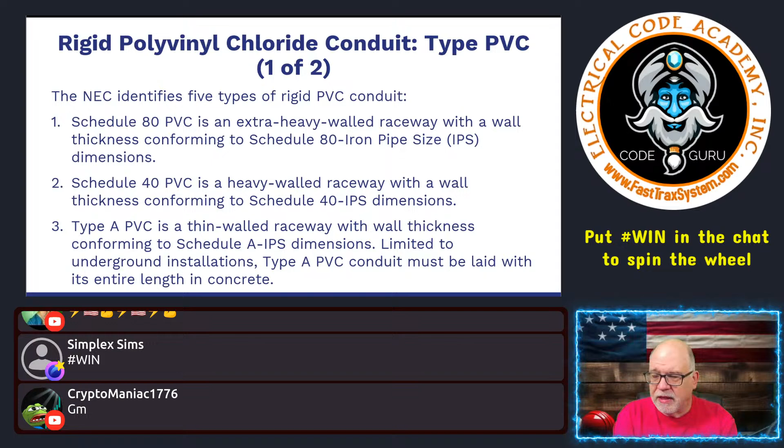A lot of people that are doing duct bank designs and things like that may use Type A PVC for that application. It doesn't preclude you from using something like a Schedule 40. It's just another type of wiring method that is PVC, Type A. Next, you have a Type EB. And again, you might not even be aware that there are different types and their applications.

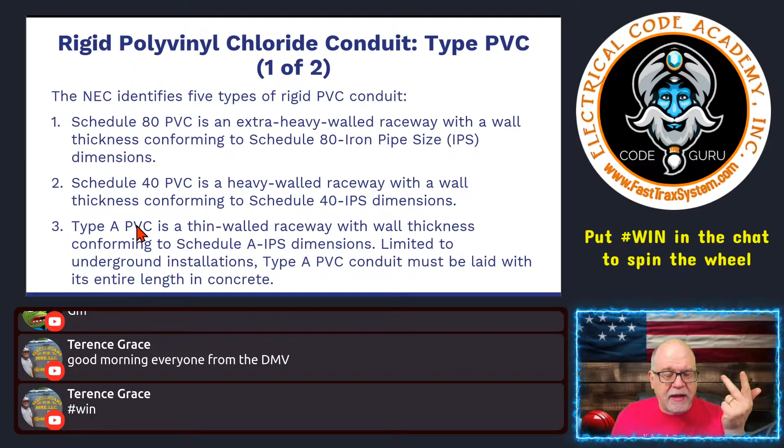So again, this recap. You have a Schedule 80, more robust in areas where you're worried about damage. You have a Schedule 40, probably the workhorse you use most of the time when you're using PVC. Then you have a Type A, which is a thin-walled version that's really designed to go into the ground and be encased in concrete. Then you have what's called Type EB PVC.

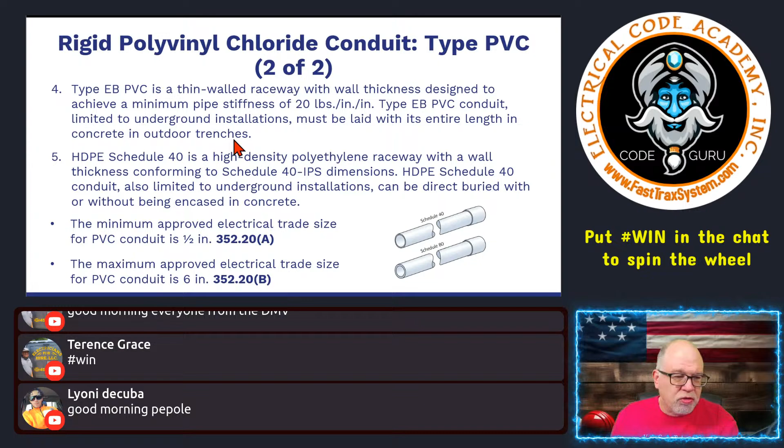That's a thin-walled raceway with a wall thickness designed to achieve a minimum pipe stiffness of 20 pounds. Type EB PVC conduit is limited to underground installations, and must be laid with its entire length in concrete in outdoor trenches. Okay.

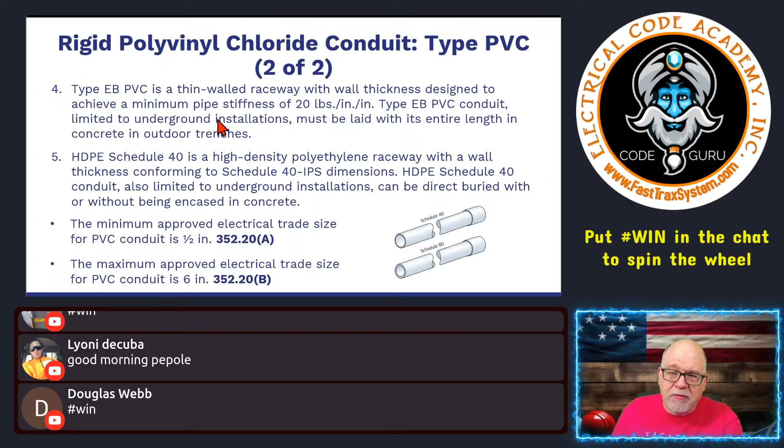Now, if you're doing massive projects, then maybe. But I don't see any benefit to it unless it's a cost benefit to have EB. So I'm probably going to see mostly Schedule 40 underground work. And as it comes out of the ground where it's subject to possible physical damage, by whoever makes that call, then you'll see it change over to Schedule 80 where necessary. That's probably what you're going to see the most.

Also, lastly, there is an HDPE, high density polyethylene, Schedule 40. So it's a high density polyethylene raceway with a wall thickness conforming to Schedule 40 dimensions. HDPE Schedule 40 conduit, also limited to underground installations, can be direct buried with or without being encased in concrete.

So HDPE is some tough stuff. It's still Schedule 40 thicknesses, meets all those rules, IPS dimensions, but it can be installed with or without concrete encasement. But it is limited to underground applications, and it is HDPE. So above ground and below ground, Schedule 40, Schedule 80.

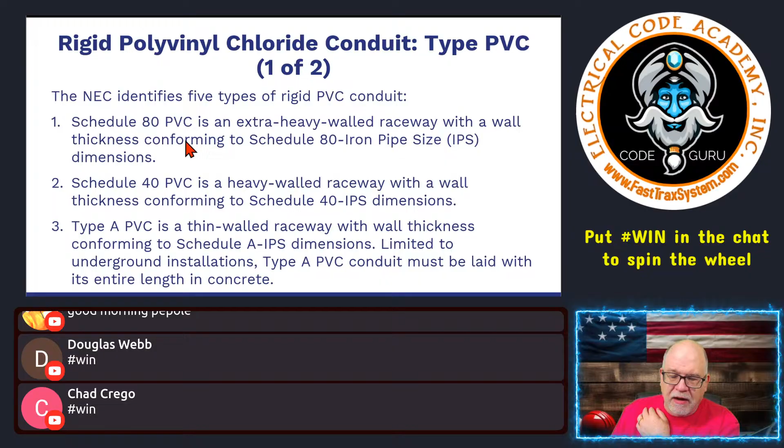The other types that are available, for below grade underground applications, EB has got to be encased in concrete, and so does Type A, its entire length encased in concrete, but it can be underground. And then, of course, you have HDPE, high density polyethylene type.

And again, don't get confused and buy that when a supply house says, hey, all I've got is some HDPE Schedule 40, it's okay. No. It's limited to underground installations and direct burial, but you don't have to encase it. Right. That type of thing.

All right. Now, as far as the National Electrical Code, when it comes to the sizes of this stuff that's available on the market, we have seen a change, and I'll go and show you. But the minimum size that you're going to find for this is a half trade size, right? We call it half inch, but it's actually half trade size. And the largest PVC that you're going to find is trade size 6.

Okay, and if you look at it, I'm going to show you. Hold on here. Let me go over here in the code real quick. Let's see. That might have been the last code cycle. I don't see anything else in there that would give anything. So we'll just stick here.

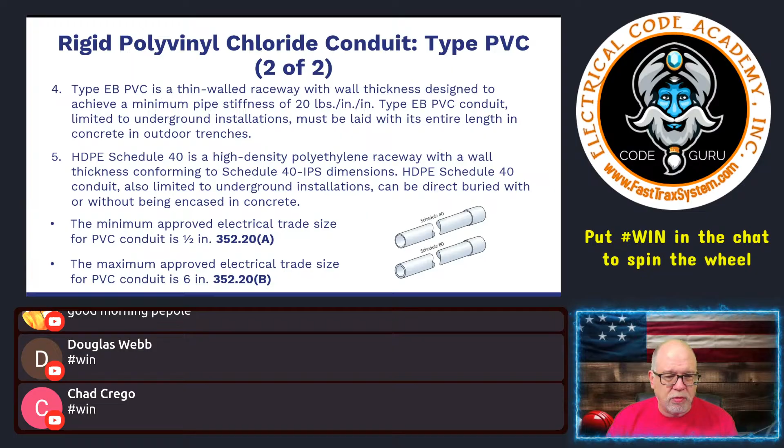So it's as small as a half, as large as 6. And I would think the majority of the 6 size PVC is probably where people would use it, running it out underground for various duct bank applications and things like that. Obviously, I'd rather run PVC than anything else, I'm just saying, in that scenario. Okay.

All right, securing PVC rigid. So, you kind of look at here. This might be hard to see. Okay, and we'll go look at the securing in .30. It's another tip for everybody when it comes to securing and supporting applications. Remember, in most of the wiring methods, .30 is the go-to location when it comes to securing and supporting applications, right? And obviously, something that's secured is considered supported.

So, thinking about where do I go to find this, especially if you're on an exam and you get an exam question and it seems like it's talking very specifically about the wiring method, PVC, but then something about that question pops in there about securing or supporting applications. Obviously you're going to go to 352 and you could bold scan, but remember that securing and supporting applications, it's the same way in 334 for non-metallic sheathed cable, .30, same scenario. Securing requirements, same thing in rigid metal, intermediate metal, rigid, all of it.

The .30 is one of those that you don't have to remember everything about it. But if you can remember the article that you need to be in and it's a wiring method, then .30 is going to put you in the right place for securing and supporting. So if I'm on an exam, I'm not going to go whipping through the back of the index looking for securing and supporting requirements for PVC, for example. I'm going to know that it's a raceway, it's a wiring method, it's in chapter 3, it's 352, and the securing and supporting requirements are .30.

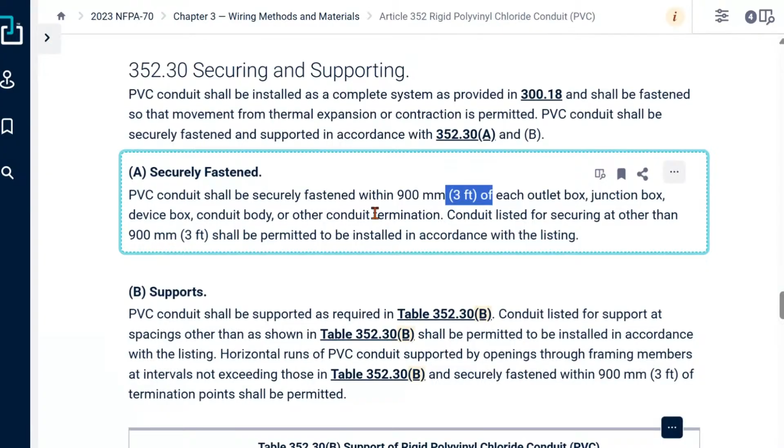All right. So that's your securing. That's the general rule, right? Within 3 feet. Can it be less than 3 feet? Yeah, if you want. That's up to you, your design. Now, when it comes to supporting, this fastening is the requirement to be securely fastened within 3 feet. Then you get into supporting. And the supporting, as it goes along the span of the wiring method or the raceway, will be securely fastening it in place, but it's also doing the supporting role, okay?

So it says PVC conduit shall be supported as required in Table 352.30(B). That's this table right here we'll look at. It says conduit listed for support at spacing other than shown in this table shall be permitted to be installed in accordance with its listing, so it's a permissive statement to not follow this table. So again, these are general rules. You could have a manufacturer that states otherwise.

And some people say, well, what if the manufacturer says differently? Well, this is the minimum code requirement. A manufacturer could say, I want you to do it at more intervals than what this is, that type of scenario, right? So remember, this is a permissive rule. It's permitted to install it in accordance with the manufacturer's listing. We just don't want to lessen the safety aspect of the code.

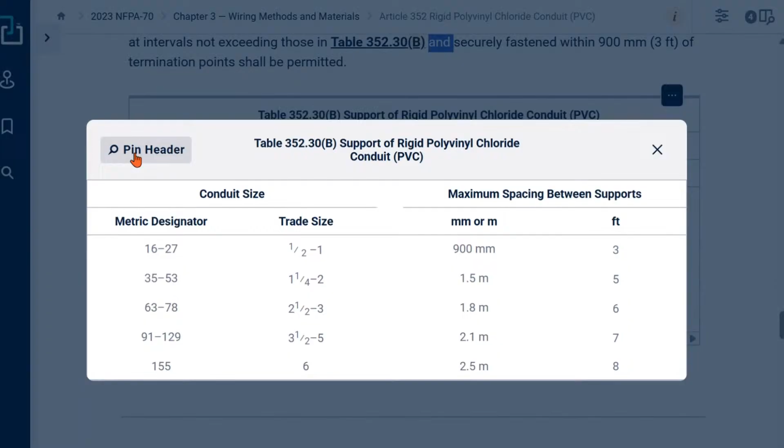So here's the table, and I'll just blow this up. I don't know how much this will show on screen. Actually, it shows all of it. Okay, good. I'll pin the header. So here you see trade size. Now, this is a metric designator used a lot in other countries. Don't be screwed up on an exam. If they give you an exam question with a metric designator, then just shift your mind and do everything under the metric designator, because they're not trying to trick you. They're just trying to make sure that you understand that you can use either or.

Okay? But most of the time, what we see is trade size. And again, we see half and we see one. We're so used to calling this inches, right? So we're so used to saying half inch, 1 inch, 1 1/4 inch. We're used to that, and it's okay. It works out for us. But in reality, that's really trade size. Okay, it's not so much the inch value. I mean, it works out.

So I mean, again, I'm not losing sleep over somebody going, oh, well, it's kind of like the sub panel people, right? They're like, well, there's no such thing as a sub panel. I'm like, well, we all know what the hell it is. So lighten up, Karen.

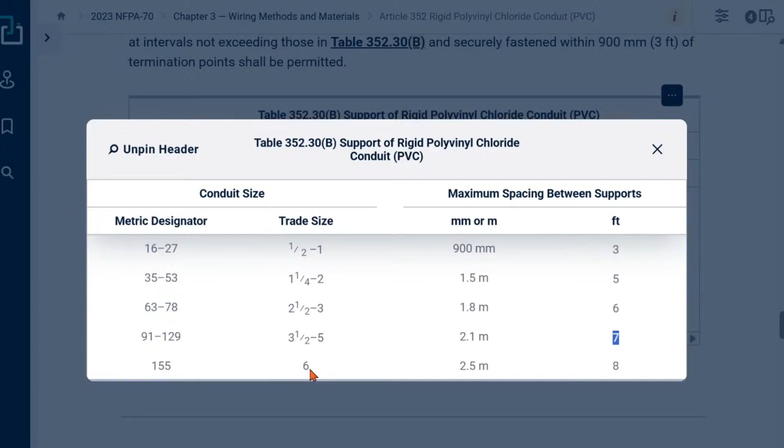So anyway, here we see half to one. Then it needs to be maximum between the supports, in your case, the straps, or your framing members, not to exceed 3 feet. Okay. So again, maximum spacing between supports. Then you get to 1 1/4 through 2. You see it goes up to 5 feet. 2 1/2 to 3 goes to 6 feet. 3 1/2 to 5, it goes 7 feet. This is a maximum spacing between supports. Then you see trade size 6, it's 8 feet. That's what we got in this application here. All right. So let's get back to the lesson real quick.

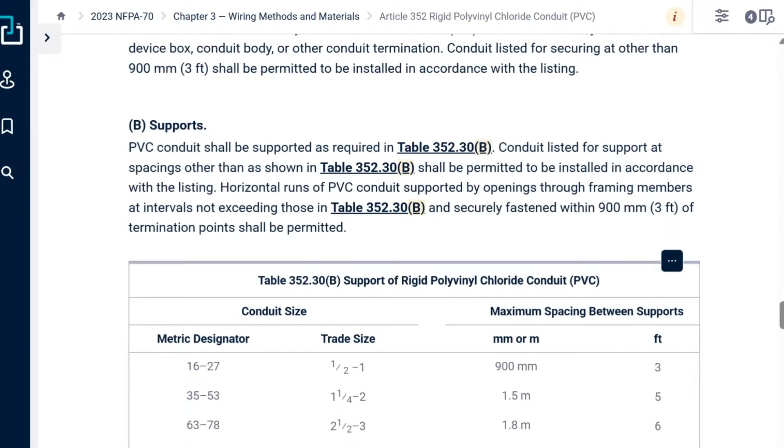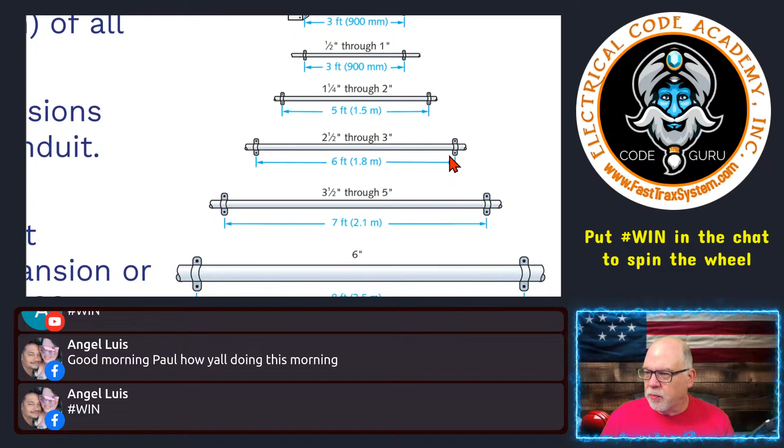All right. So here you can see, here was the 6 feet we saw. Here's the 7 feet, which is the 3 1/2 through 5. And here is, and I know it's hard to see it. That's better, right? Here's the 2.5. So here's between your supports. These just happen to be shown with 2-hole straps. Perfectly okay, as long as it's listed for use. You have to remember that there's a little old pesky thing in the code called listing, right?

So there's also a big argument right now whether or not straps are listed, and we see a lot of this changing. 352.6 actually says PVC conduit, factory elbows, and associated fittings shall be listed, and the argument is whether or not these straps are considered fittings. I can tell you right now, when you buy a strap for use with PVC, ain't nobody going to critique it. The only problem you're going to run into is when you try to do something stupid, like use nails.

And yeah, you could say nobody would ever do that. I got pictures of that. People do stupid things to support stuff. So yeah, as long as you don't do anything stupid, then you're going to be okay. All right. Let's see here. Okay, so there you go.

So PVC must be fastened so that movement from thermal expansion or contraction is permitted, at 352.30. So again, depending on the temperature, you have your ambient temperature, then you have the hottest it can be. Typically you can get this information from your weather service, or from different places like, I think, Copper Development has a document, ASHRAE has a document that can show you different temperatures.

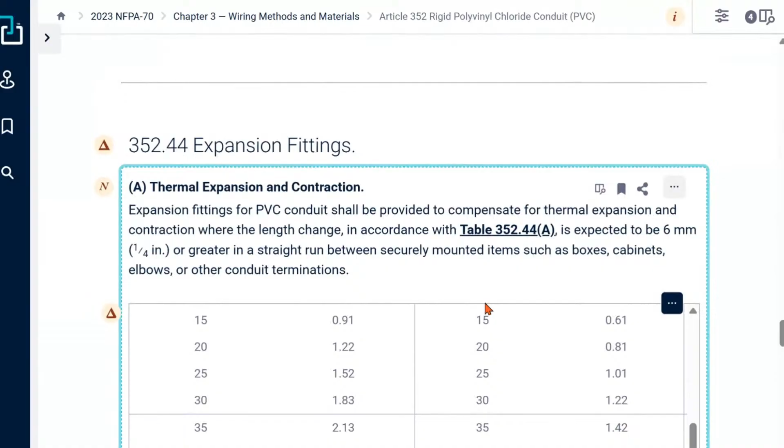And I was thinking I had an example here. Here's an example, but here's your table, by the way, if you're not familiar with how to do this and you're on the side of a building. I don't know if this whole table will show up. So here you see kind of the formula that works this whole out. And here you're looking for the length of change in PVC conduit. You'll see the different changes in length depending on the temperature change, and you'll see that over here it's in Celsius, and here you see Fahrenheit.

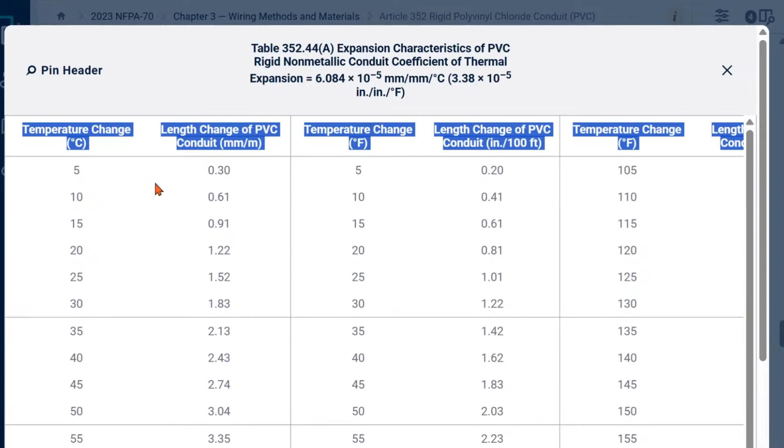So all of these over here in Fahrenheit, which is what we typically will run into, and then of course you got Celsius down here. And you'll see this goes down to 100 degrees Celsius, and over here in Fahrenheit. It goes all down. Now, one of the big things to remember here is this is your millimeters. We don't typically tend to use this that often. We're over here, doing temperature of change.

And what we see is you have the length, and this is inches per 100 feet. So a 5-degree temperature change results in 0.20 inches of movement in 100 feet. So that's what you see there. So this is where you're going to get the table depending on what your temperature change is.

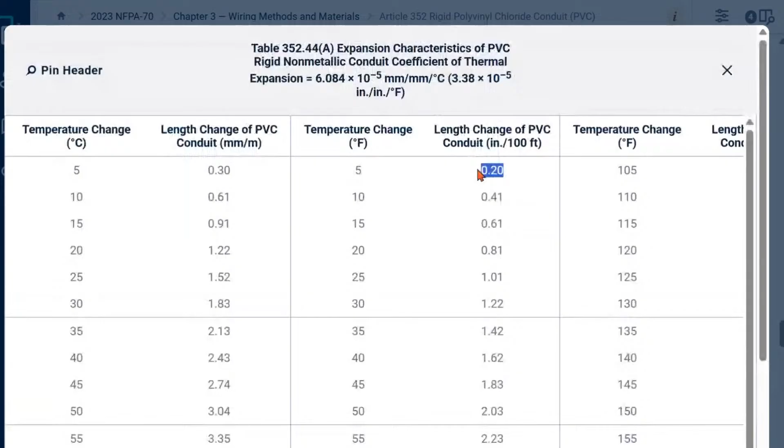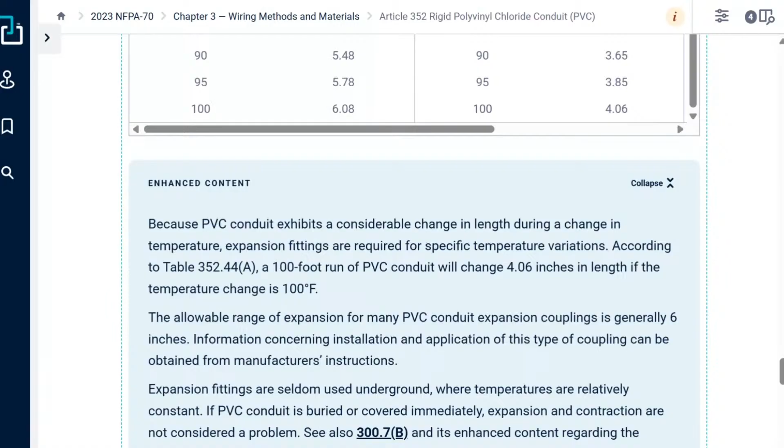Now, the one good thing about the code is here, and many people don't realize it's here, is this informative commentary, right? And if you have LiNK, the commentary is available to you. It's probably the same example that's in the handbook. But this just gives you an example. Because PVC exhibits a considerable change in length during the change in temperature, it expands and contracts, and expansion fittings are required for specific temperature variations.

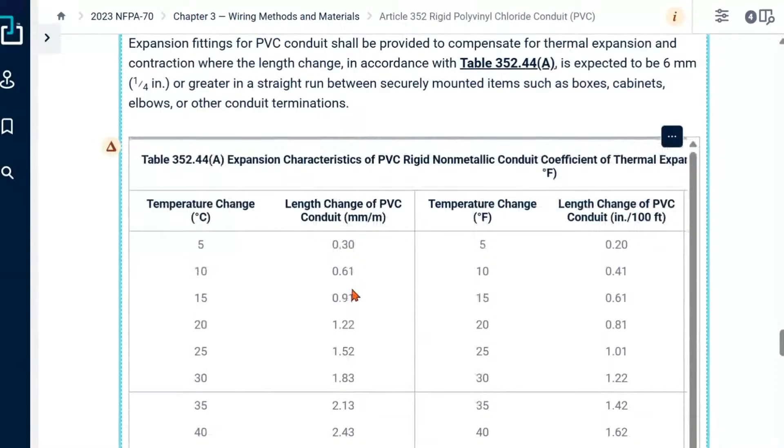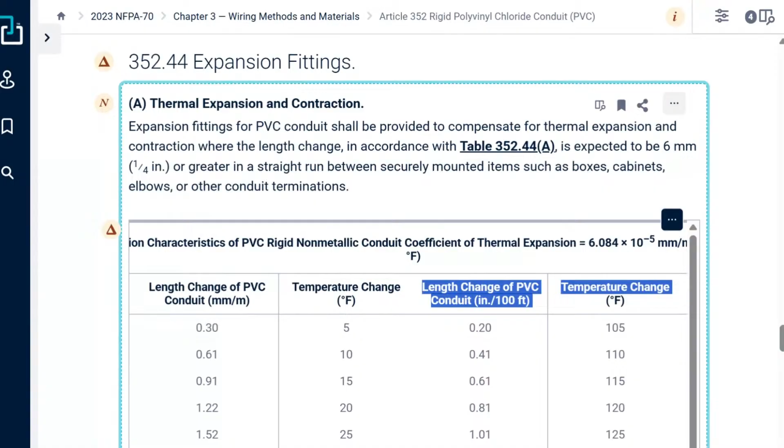According to Table 352.44(A), a 100-foot run of PVC conduit will change 4.06 inches in length if the temperature change is 100 degrees Fahrenheit. So if your temperature from the lowest to the hottest can swing 100 degrees, depending on the time of year, you've got a swing of 4.06 inches per 100 feet. So it adds up. It's a little movement along the way, and it all adds up cumulatively. For every 100 feet, you're going to have about 4.06 inches at a 100-degree temperature change.

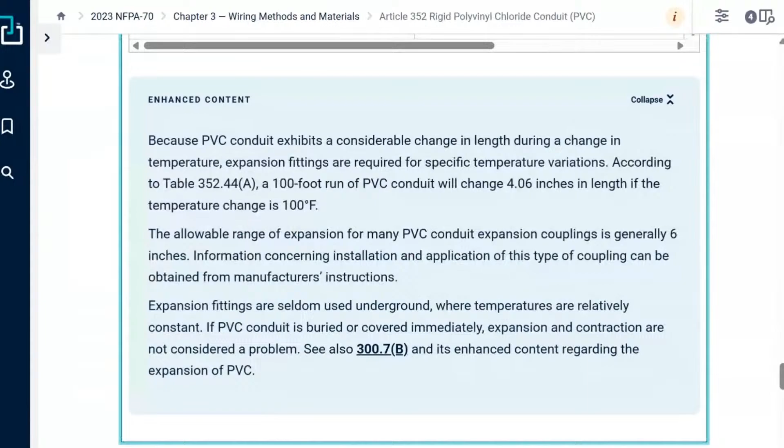Now, the allowable range of expansion for many PVC conduit expansion couplings is generally 6 inches. Information concerning installation and application of this type of coupling can be obtained from the manufacturer. So when you get the manufacturer's, let me get back to me real quick.

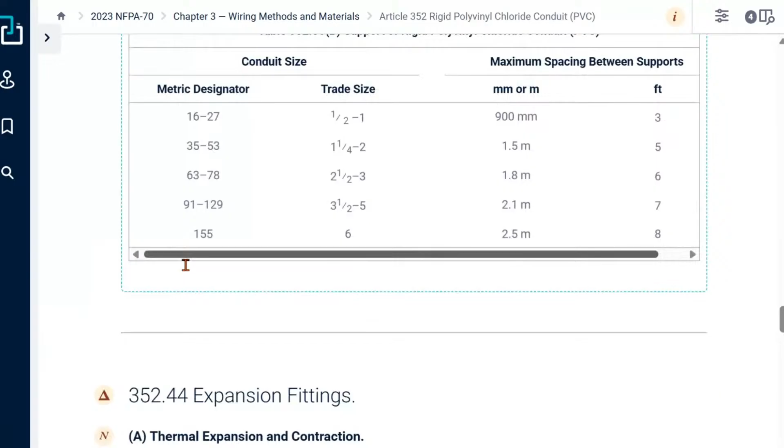We'll go look at the code real quick. 24. We'll kind of scroll back to 24(A) so you can see this. Where am I at? Sorry, I went too far. 22. There we go. Bends, right? So bends shall be made so that the conduit will not be damaged and the internal diameter of the conduit will not be effectively reduced.

I mean, it's still the same diameter, right? But if you bend it improperly and it kind of footballs out a little bit, then you've effectively reduced the diameter, okay? Now, diameter is measuring across, right? So we have circumference, we have diameter, and we have radius. So if you bend it and it squishes down, and you say, well, it still has the same amount of area. Well, it says right here it doesn't damage the internal diameter. This way the diameter may increase, but up and down where it squishes, the diameter is decreasing. Doesn't matter which way you measure it, it's effectively decreasing diameter.

So when an inspector looks at how you bent it, they're going, well, if I see scorch marks and I see that it's kind of elongated out, that's a problem. Now, you might say, well, Paul, relax. It's only two 12s, maybe three 12s and an equipment ground. You're thinking, Paul, come on, it's not going to hurt anything. I mean, code is code.

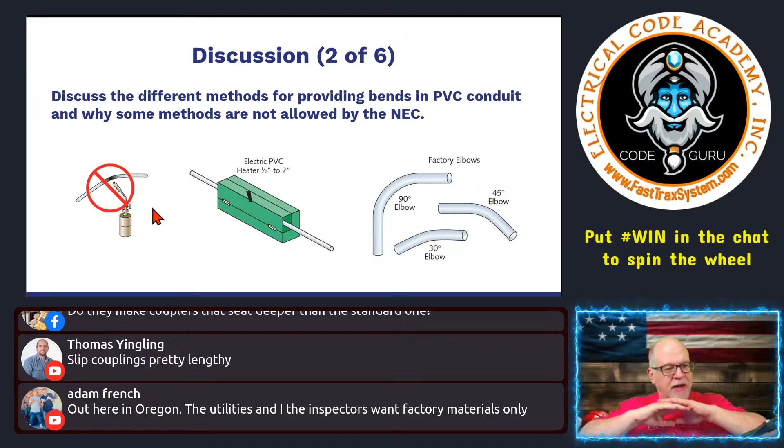Discuss the different methods of providing bends in PVC and why some methods are not allowed. Again, blowtorch not allowed. Heat gun, controlled distance, in a pinch, as long as you don't scorch it or damage it. I mean, nobody's over your shoulder, but I would recommend you not use a blowtorch, because the moment that you scorch it, the inspector has every ground to say, no, thank you. Heat boxes, they make them in various sizes. And of course, factory elbows.

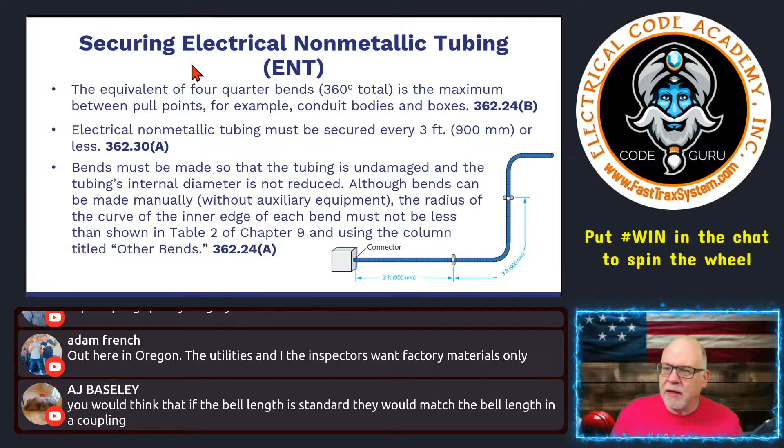Securing, oh, that's ENT. So we're out of PVC. Good, perfect timing. Just a few minutes over. So tomorrow we will get into another wiring method and talk about it. Probably EMT. Let's see. One last thing I'll touch on.

As you all know, the number of bends in the conduit shall not exceed 360 degrees between pull points, right? So junction box to junction box. Those are considered pull points as well, if you can access it and you're going to be pulling conductors in it. So don't exceed 360. So again, you're not going to have more than four 90s.

But remember, when you're doing 360 between pull points, the 90s add up, the offsets add up, all those types of things. A change in elevation where you bend it and put an angle on it. All those degrees add up, so make sure you're not at more than 360 between pull points. Okay, so keep that in mind.

And by the way, if you're using larger PVC and you're going to exceed the 360, and you have a designer that says, "Look, we're going to be exceeding 360. Let's just put a box in there so we can meet this rule." You can't just throw a box in there. If you throw a box in there, then it could conceivably be used as a pull point, right? And then you're going to have to follow the pull rules in 314.28, and that's 6 times or 8 times, depending on whether you're doing angle or straight pulls.

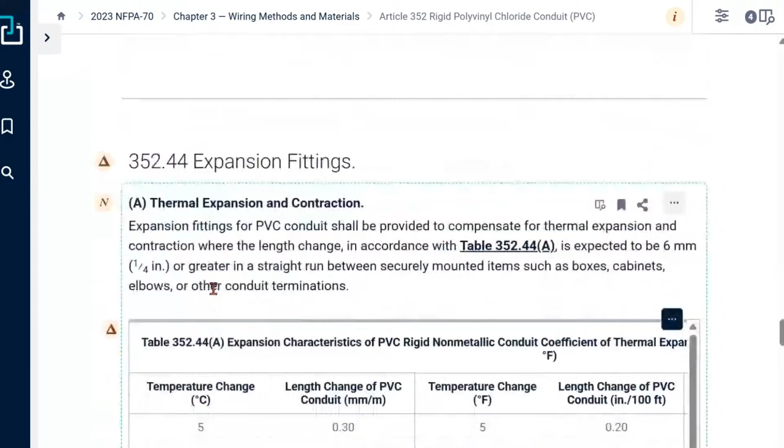Also, since we're still on PVC, we want to cover earth movement. So this is new right here. Not new, but new in a sense that it was relocated here, okay? And it also refers you to 300.5, because that is for underground installations, direct burial depths. It says, expansion fittings for underground runs of direct burial PVC conduit emerging from the grade shall be provided above grade when required to compensate for earth settling and movement, including frost heave.

So again, when you've got direct burial conduits going underground and they emerge from the ground, these expansion fittings shall be provided above grade when required to compensate for any earth settling or movement, including frost heave. So this is not just back in 300. This is here now also in 352. So having an expansion fitting where it comes out of the ground, if there's expected earth movement, your jurisdiction will know that. You'll get used to that.

Your AHJs, it's not just for the service. This is in 352. This is not just for when it comes out of the ground to a service. Still germane, but you see that it's been added here in the 2023 edition of the NEC. So if there's expected movement, you're in an area where there is a lot of heave, then any of those PVC raceways coming out of the earth are going to have an expansion fitting on it to compensate for that movement.

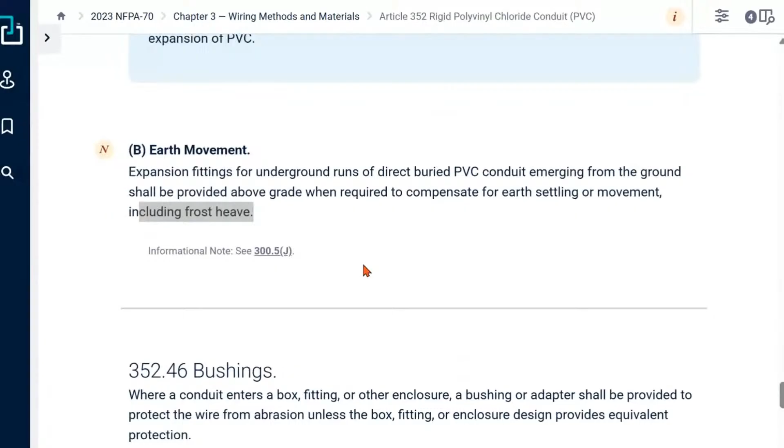Bushings. Here's a misconception that people don't understand when it comes to, do I require bushings? Now, we're not talking about the one in 300.4(G), where you have protection of conductors that are 4 gauge and larger. That's a general requirement. For insulated conductors of 4 gauge and larger that come out of a raceway, that is 300.4(G). This one is specific to PVC.

It says where conduits enter a box, fitting, or other enclosure, a bushing or adapter shall be provided to protect the wires from abrasion unless the box, fitting, or enclosure design provides equivalent protection. So you might have a fitting that's designed itself with smooth edges, a belled edge. It could be the fitting itself. Again, it's going to be one of those calls that you're going to have to make. I've seen plenty of small 1/2, 3/4, and 1 that are not smooth as they come out in the thread.

So interesting about 352.46 is, remember the one in 300.4(G)? That's specific to 4 and larger, right? This rule right here does not have a size on it. So as you can see right here, it's not limited to 4. So 1/2 inch, 3/4, trade size 1, 1 1/4, whatever. It says you have to provide a bushing or some type of adapter on the end that's not going to have that sharp edge on it.

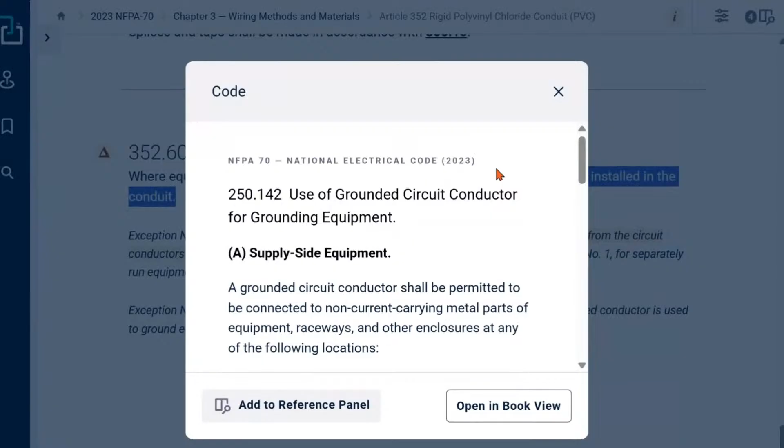So prior to '96, I believe, that's the situation where you can use the grounded conductor, like with ranges and dryers. No, actually, I don't think that is that. No, I think this is okay. Yeah, so that's different. This is where you don't have an equipment ground run, because this is dealing with supply side applications, where you're actually using the grounded conductor and you wouldn't need an equipment grounding conductor because there's absolutely nothing that can trip it.

I don't know where I went with the other one, where my mind was going with that.

Anyway, so again, there's examples where you would use the grounded conductor on the supply side. And if that's the case, you're not going to have an equipment ground. What's the point? You're not going to clear an overcurrent device because it's on the supply side. And that's what it's talking about, 250.142, and certain things like that.